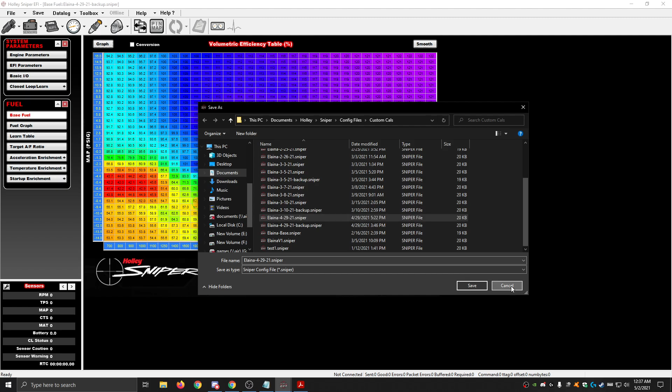So you want to save your backup as untouched, and you want to create another save as with just the date. And obviously don't hit cancel, and then this name will change up here. It'll say your new name. That way you're making changes to the new file and not to the backup. So anyways, you've got your config file open.

Now I touched on this before. You can modify all these fields here. You can highlight. It's hard to see, but it actually does highlight all of these. Same thing across the bottom. You can change these fields to whatever you see fit. You can do things like punch in 600 and then punch in 6500 as a max, and then highlight all the way across, and then you can right click and fill row values, and it will average out the exact increments in between each number all the way to those numbers. I'm going to Control Z that and undo my changes so it goes back.

Now know this, Control Z, which is undo, does not work for everything, so be careful. For instance, if you highlight fields here, you can use Control up arrow and down arrow to make adjustments. I want to say up arrow is 1% increase. Yep. And then left and right is 5% decrease and increase.

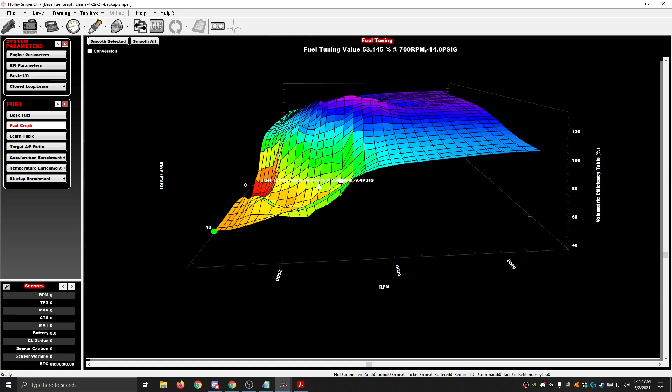Once it learns a little more, I'm going to go in. If you go to graph, my fuel graph looks terrible. It's all kind of lumpy. I will go in here and manually smooth this out later. But right now, I'm just going to let the learn keep doing its thing.

I think I actually have an exhaust leak by my downpipe. By the way, I have a Turbo 302, so it's a built motor and quite a bit modified. But I think my downpipe has a little bit of an exhaust leak that I have to fix.

So I'm not really concerned so much with this. It's running solid, and it's not enough to cause a crazy lean issue to make it start throwing fuel in it. So I'm just leaving it as is.

All right, but anyways. So apart from your learn table, you have your target air fuel ratios. Now in here, I need to play a little bit more because I feel like my idle at 14.5 might be a little bit too lean. I might bump it back to 14.3, maybe around 14. I don't know. But you need to populate this target air fuel ratio table through this software, and don't use the basic idle, cruise, wide open throttle. It makes a terrible thing.

This table right here is actually taken straight out of the V5 software. So Holley uses V5, V6 to tune the Terminators, HPs, Dominators, all the higher end port injection systems. There is a Turbo 302, like 5-liter Fox Body turbo tune, which is where I got this from. I also used their spark table. I did modify this a little bit, and I did modify the spark table a little bit.

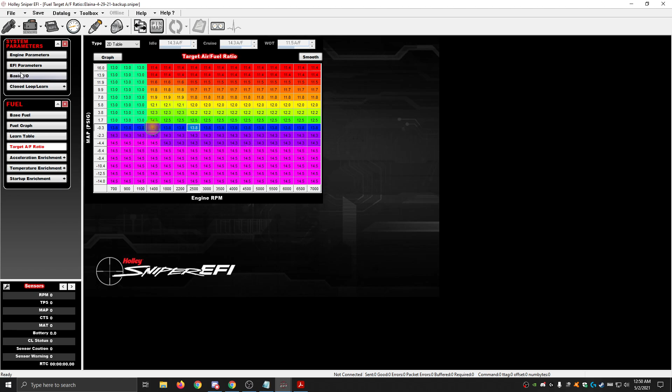All right. Another thing to touch on, if you have the upgrade of progressive linkage like I did. There's a couple things I touched on in another video that you can upgrade on the Sniper to improve functionality. One being a bunch of people have whistling issues. A 1/4 inch 4-hole phenolic spacer fixes the whistle from everything I've read. That's one thing. Another is progressive linkage. If you have it, you need to configure it, or it's not doing you a whole lot of benefit. You're actually kind of hurting yourself. You're going to be dumping way more fuel than you need to be.

And the other thing is I actually have a throttle arm extender, which just adjusts the feel of the pedal. But anyways, to find this percentage, you're going to have someone look at the handheld, and you're going to rotate your throttle until it starts putting pressure on the secondary. Whatever that percentage is, that's what you need to put in right here. Click that, type that in.

So next, we'll touch on acceleration enrichment. So acceleration enrichment, you're going to have this main chart. And something I should have gone over right off the bat: a bunch of people haven't actually taken the time to read the manual, which I haven't read all of. I skimmed through it as I needed. You don't have to print it necessarily, but it wouldn't be a bad idea for people that aren't computer savvy. I have access to a laptop all the time, so I keep it as a PDF.

But anyways, the Sniper instruction manual is on the Holley website, on the actual product page. But if you don't have it, it's literally built into the software. So anywhere you're at, I'm on this acceleration enrichment page right here, this help button. You click that, boom, acceleration enrichment. Brings you right to it. All right.

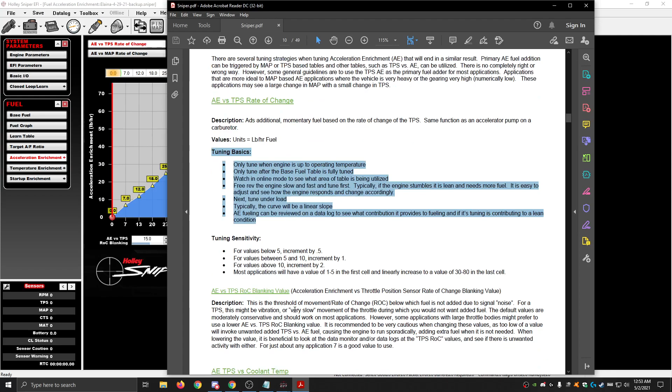So this watching online mode, that's talking about using the strip chart, right? But read this. I'm not gonna sit here and read everything, but read this stuff. It will tell you how to do a majority of the tuning. It goes through and briefs on what everything is.

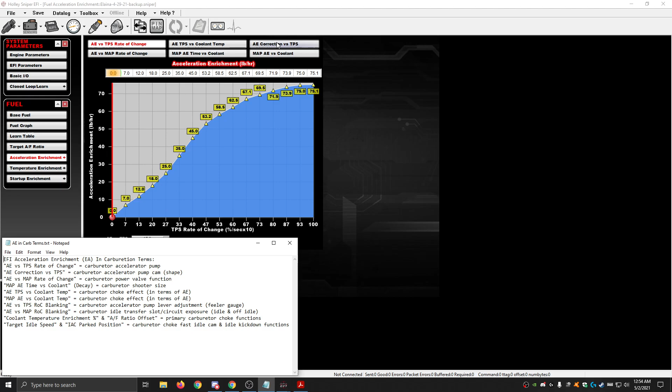All right, and another thing I found online when I was Googling, so I made sure I wasn't quoting bad information on the acceleration enrichment, is this for all you carb guys. If you want to pause the video right here so you can read this, this is just a copy paste that I got. But this is a breakdown of what the acceleration enrichment terms are up here as related to a carburetor, right? And most of this stuff is what I was actually correct on. The only thing I wasn't positive on was the correction versus the rate of change, which I figured out.

So these numbers are going to vary, and like the manual or the PDF says, you're going to pretty much pop the throttle, and this line here is going to show you your rate of change. It will climb if you're actually linked. This will scale, and you'll have your strip chart open on another window. But as you're popping the accelerator or pumping the throttle, it's gonna move up this graph, and this little yellow bubble is gonna move across as well.

So this I've messed with a little bit. I actually tuned it back some because it was seeming a bit rich when I would tip in, and I think the reason for that is because I installed the progressive linkage. So now what used to be all 4 barrels opening at once, now I'm only opening 2 barrels up to 39%. So it's a whole lot less air instantly going in. So all these numbers need to actually tune back up until probably about 39%, a little bit.

The other thing is this correction versus TPS. You're going to need to rescale this at the percentage roughly where it starts, which this graph is actually wrong. This was one of the things I changed from the backup to the other one. I set this and then went back and realized that my TPS position actually opened a lot sooner. I was going off a base value.

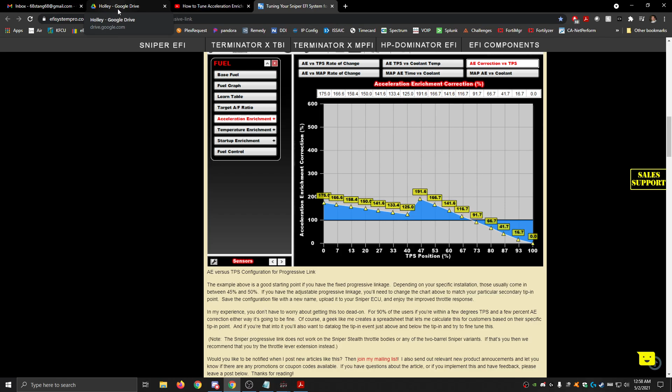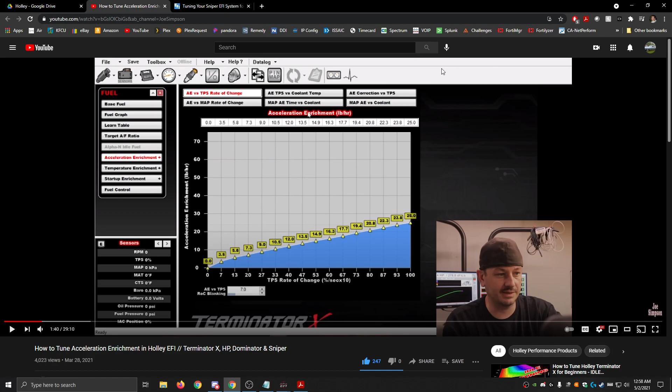If you use Google, like Gmail, like several people do, I suggest using the Drive feature to store things. You can store your config files, data logs. I store the part numbers. I have a whole bunch of tuning information here that I've saved from PDFs and whatnot. It's a good place that you can access from inside on a PC or a desktop to outside on a laptop when tuning when needed.

So anyways, back to this. I won't go over acceleration enrichment anymore, but more or less do like what Joe Simpson's saying: data log, go to the strip chart. You're going to have to go from 0 throttle, just pumping the throttle at whatever percent, and see if you get lean spots or stutters.

Then the crappy thing of what takes so long is you're not always going to be hitting the throttle from an idle. You're going to be cruising at 20% throttle going down the highway or the interstate, and then suddenly the car next to you wants to mess with you, just playing, only when you're in Mexico, right? So say you need to pass somebody, you're going to punch the throttle from 20%. Well, now you might get a stumble from this jump, so you need to adjust there. That's what's going to take so long, and that's why I say it's best to go on a data log, because a bunch of these scenarios are going to be hard to do because they're going to vary.

And one of the things Joe Simpson says as well is you can't really mess with any of this until this is right, because more than not, it's this that's wrong and not this. All right? Because you might be hitting areas of vacuum that you are not under normal driving scenarios. So while you might be right here holding 20% throttle cruising on the highway, when you punch it, now you're suddenly down here where you wouldn't be under a normal scenario. All right.

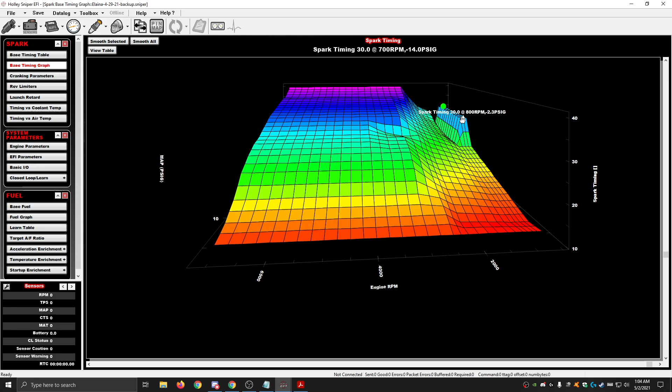So it could use a little bit of playing with, but it's a big drop from 30 dropping down to 25 here. But it seems to like it because it doesn't actually jump instantly 30 to 25. It varies it in between. So in between 900 and 1000 it goes back and forth a little bit between 26, 27, 28, and so on. And then of course I have idle timing control as well.

So a little touch on data log stuff. With data logging, what you can do is you check these upper boxes to populate the lines. This lower box here is what puts this field here, and this can be scaled. You would just left click here, punch in the numbers for min and max values, which you want to scale properly, so they'll show up. Now if you see I have negative numbers here and there, negative 100 here, that's to get it off the bottom.

So if you have it at 0, when it's at 0 RPM, you're not going to see this line, and it's hard to click on to follow it. So I punch in a negative number just so it raises this up just a hair. All right, but scale these to where they're valid values, or else you're not going to be able to do much. So in here you have different presets you can load, and you'd go to edit views to customize these. I just made a couple different ones.

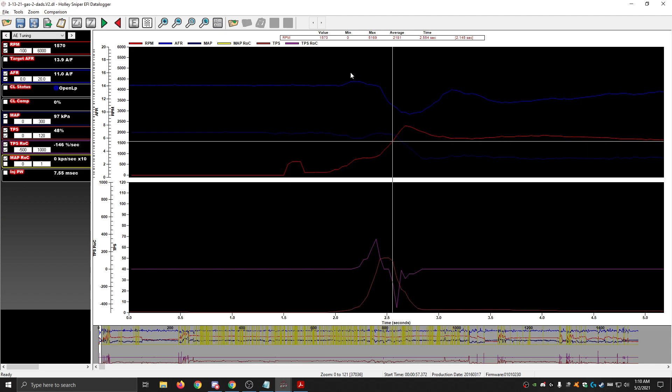Now, in this session, I actually tuned out my cranking fuel a little better. I have a video on that, and I want to touch on that a little bit at the end of this. So mine was not wanting to fire up right away. You can see there's the AFR. This is where it was firing, and it's right at stoich, and then it dips rich. Now that's what I want to touch on, is I was still sending too much fuel, because that is really rich, and then it fixes itself. It comes back, and it's starting to go through the coolant enrich right here.

So let's change to fuel tuning. Oh no! Let's see, AFR, target AFR, and coolant, so there. Oh, actually this was at temp. So yeah, this is at temp, and here's my AFR. This is up to temp, because all your numbers here are going to change on the left hand as you drag across, and you can see it at the top here too.

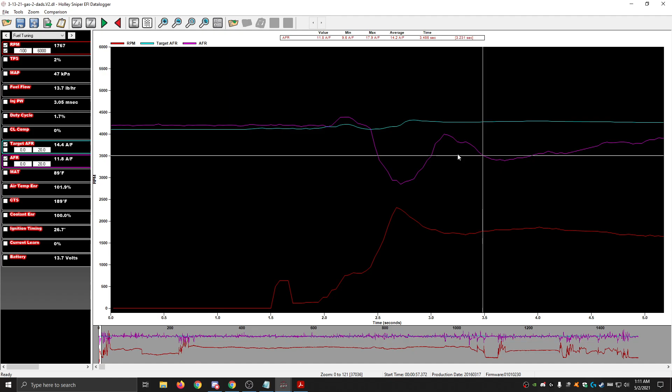So when it fired up, it went super rich, and then it's coming back. This is probably the after start hold, and then there we go. Now we're back to roughly the idle. It's slowly coming back up to the hold, and then we're pretty much spot on. Goes a little lean there. But yeah, you get the picture.

There it is. Okay, I guess it did something weird. So it still doesn't show here for some reason. I don't know why. But anyways, data log is mainly where I wanted to see it. So in here, this name field, it would just show custom number 1, 2, and 3 on the data log and the strip chart. Now it actually shows this name like it's supposed to.

And I touched on this before, but you can buy 100 PSI sensors at Low Dollar Performance, Low Dollar Motorsports, something like that. Search them on Google, it should come up, and it's dollar with an ER. You just buy their sensors because they're like a third of the price of Holley's, and you just configure the values.

You just have to change this calibration curve down here. You have to change these voltages and these right here to match. I think it's the voltages. Maybe just change this number. Anyway, you have to change it on the calibration curve so it reads correctly.

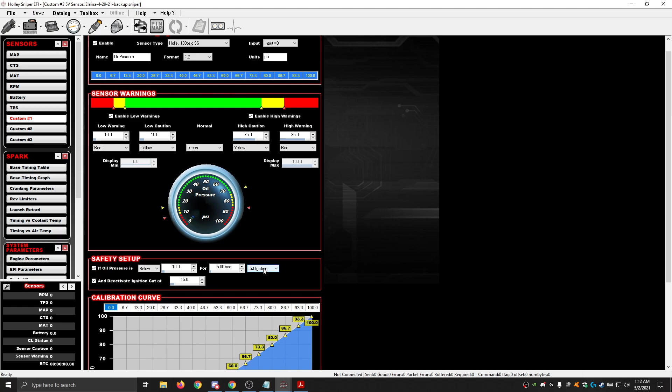But a bunch of people don't know that in these sensors field, you have safeties. You can literally set safeties to turn your motor off or to cut ignition or whatnot if it has an issue. So for instance, on the coolant temp sensor, if it gets too hot, you can literally have your car automatically kill itself to prevent your motor from overheating.

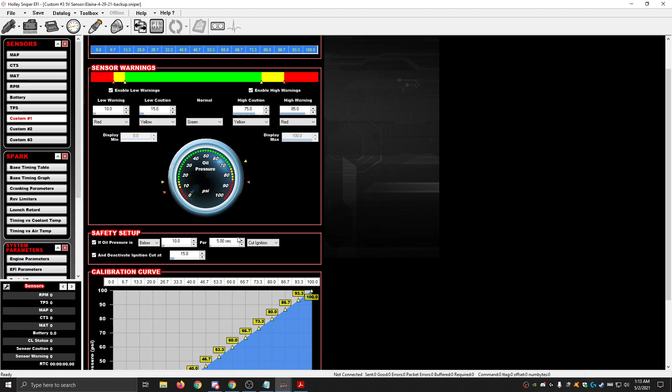Manifold absolute pressure. If you overboost, if you're running boost, you can have it cut ignition. Same thing here. I'm running an oil pressure sensor. If I lose oil pressure, I can have it kill the motor. I also have a dome pressure sensor that's not as critical. That's for my wastegate dome.

And then fuel pressure. I have it set that if I lose fuel pressure, so to keep me from getting a lean condition, as soon as it detects a low fuel pressure, it's going to cut ignition. All right, and then when pressure's back up, it works again.

And these sliders here, these low cautions and high cautions, warnings. This is where you go to adjust your handheld from showing yellow and red when it shouldn't be. If it's popping up yellow and you don't feel it's a reason to be cautioned, adjust it. You can change these values. You can change the colors. All right.

I want to say this gauge panel can be customized. I don't remember. I want to say you can customize the handheld gauges in the software, but I'm not sure. You might have to do this in the handheld. That's something I haven't done yet and I need to do. So anyways,

startup enrichments. So this is where I went back and changed. Something I read online that I wasn't really aware of is you don't actually need this fuel prime. This needs to be tuned to where, like, this fuel prime is an initial fuel shot when you key on. It primes the pump, which obviously if you check that, then that's the prime amount.

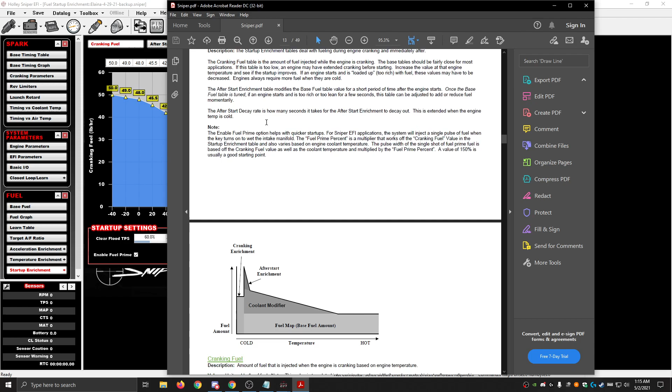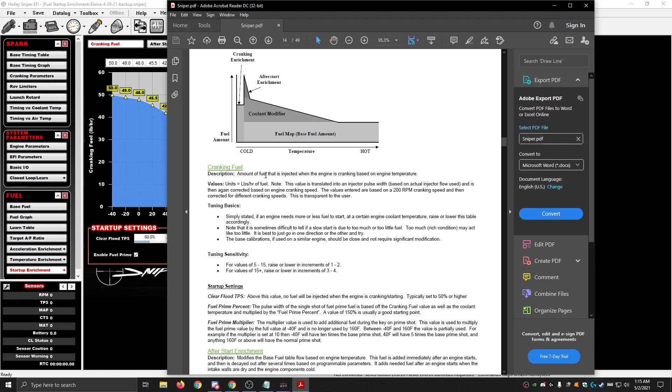But I don't remember if this... I don't think this fuel prime percent is like an amount of time that the pump primes, or this multiplier. I have to double check that. Let's see if it actually says. One more reading session. Did I miss it?

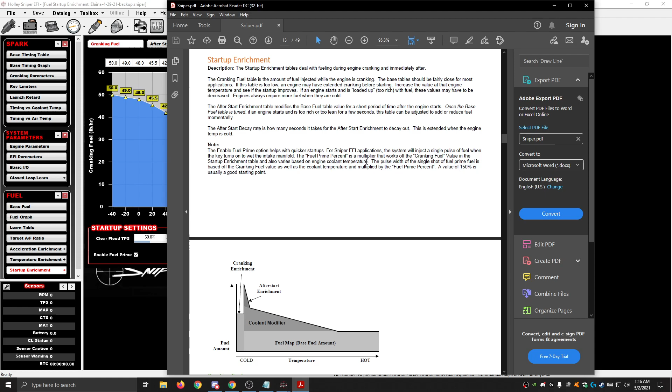Yeah, so let's see. Fuel prime percent is the multiplier that works with the cranking fuel value in the startup enrichment table. Blah, blah, blah. And it comes with a default value of 150. Well, anyways, what I've read was that your cranking fuel should be, I think they said, 10% more than what your pound per hour is. So my base fuel, how much it's actually feeding pound per hour, if I change the conversion, we're right around 5, 6, 4-ish.

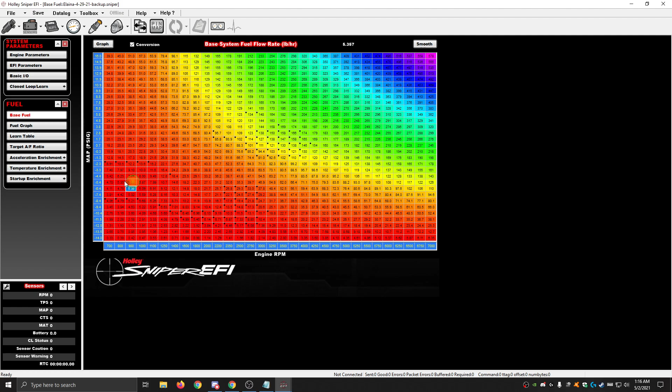Now what I ended up doing was going into my data log and looking at this fuel flow at idle. This is it coming down, so let's scroll over. It'll come back. This is roughly idle back here. It's a little high.

Alright, sorry. Wireless headset died.

So roughly at idle here, I'm sitting at right at 7 pounds an hour. What I found the other day was, see, my running is right around between 160 and 180. So I brought these down to 7-ish. And you can type here and hit enter, boom. So I set these to 7, I think. I think I raised this one up to about 8.

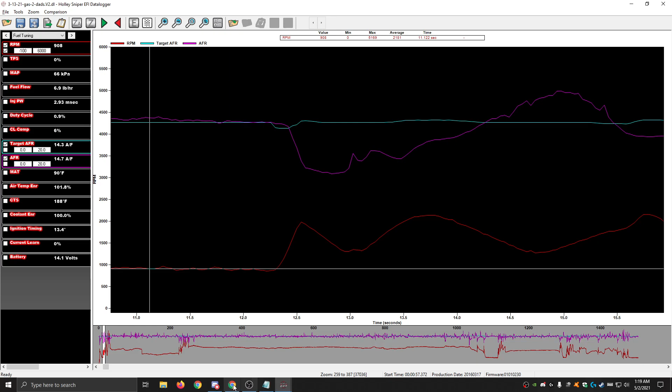So much better. So I ended up saving this, and I came back to fuel prime, because this fuel prime is literally just supposed to help wet the intake, to give your engine a little bit faster firing, because the cranking fuel doesn't kick on until it sees RPM. So this is more or less just to pre-prime the system, give a wet shot, and the fuel pump shuts off. If it's anything like mine, my reg actually loses pressure almost immediately. It doesn't hold pressure for whatever reason. I don't have any issues starting my car though.

But afterwards, I ended up turning this back on and playing with it and adjusting these numbers some. I don't remember what this fuel prime multiplier does. I want to say it's something to do with the wet shot as well, but it's like a scale of this percent or something like that. I watched or read something on it a while back and I don't remember, so you'll have to research and see if you can figure it out. I think I ended up setting this to 125% and 3, and that was a happy place for mine with roughly this config.

In fact, I can actually open it and look. No, I don't want to save any of those changes. So, oh, not that. We're gonna go fuel, startup enrichment. Boom. So there's mine. That's what I came up with. 130 and then this. For my Turbo 302, this fires immediately now. Now that was for warmed up. I haven't fully tested the cold, so I might end up needing to adjust these back here.

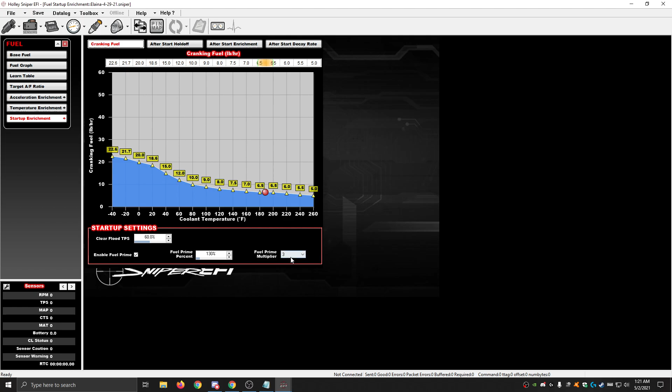Granted, it's going to be probably around 60 to 80 at the coldest here. Every once in a while we get freezing temps like 20 to 40, but the majority of the times when I fire up my car, it's 80 degrees out, if not closer to 100 degrees out. 80, 90, somewhere in there. Probably between 75 and 85. So you might want to play with this more so than what I did previously in my other cranking video, which was just playing with this, and see if it helps.

And then after, it has all these other adjustments you can do for after start holdoff, for enrichment and whatnot. Same thing for the temp enrich. Acceleration enrich has the same things. And obviously you have idle stuff too. You have your idle speeds and your IAC settings, which more times than not, I see these needing to be adjusted on people's vehicles because they have problems with idle, either stalling coming off gas, going out of gear into neutral, or coming up on a stop sign and wanting to stall. This is where you're going to play with that.

My IAC park position is actually pretty low. I might bump that up later and play with it. Every once in a while, my IAC acts screwy. I don't know if it's a faulty IAC or what, but mine wants to hang every once in a while. It's not the throttle sensor, so it's got to be something with the sensor. But I haven't ever been data logging when it happens, so I don't know if it's some weird RFI thing. I don't think it is though, because I wouldn't think it would hold. I would think it would fluctuate. So I feel like I've got a faulty sensor that acts up every once in a while. It's not annoying enough for me to replace it yet.

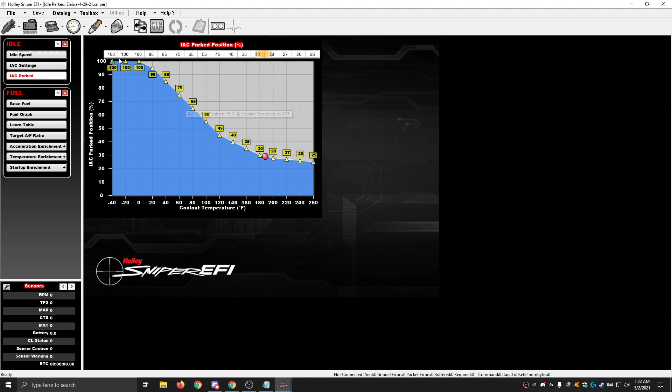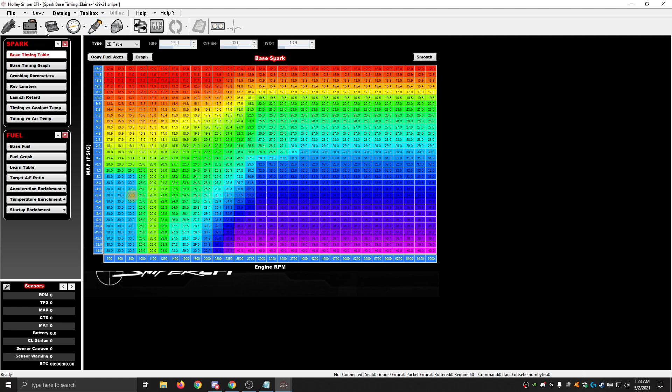And then of course your park position for coolant temps. You're gonna need to play with those if you're having idle issues as well. So I think I've touched on everything tuning-wise that needs to be played with. The main things to focus on being this target air fuel ratio, transferring the learn table, building a spark table, setting your progressive linkages, and then data logging and using your data log to help build out this fuel map.

If you stuck around this long, this is almost an hour-long video now. But if you have any questions or anything you're curious about, ask away. Maybe I know and can help. If it's something I've done or I can help with, I'll be glad to make a video on it, or comment, message, email, whatever, to help you out. Or if I don't know, I'll try to learn it and see if I can help you. But hopefully this video helps you start tuning and get your feet in the water.